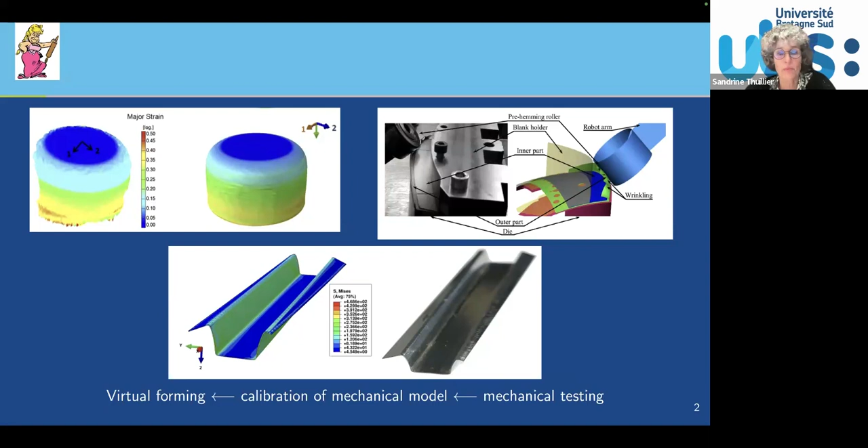So in order to characterize anisotropy, hardening, and rupture, the aim is: how can we deal with such a huge amount of information? I will start with a question for you.

So what is your absolute dream? In the field of mechanical testing, of course. Well, mine is: I would like to have such an input. This input is to have the equivalent stress as a function of the equivalent strain for a given material.

You have really a perfect, unique curve that describes the mechanical behavior of the material. Of course, to derive such a curve, you need a model in order to have everything superimposed, whatever the orientation, for example, of the tensile test. And this dream, well, in order to reach it, you need several mechanical tests.

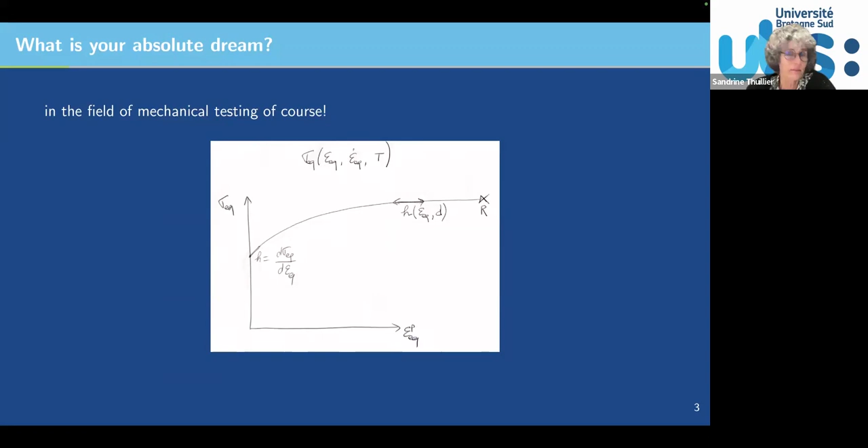And I think we are not that far. Here is, from the literature, an example of this: the flow stress as a function of the true plastic strain. Well, it's not one curve, but we are coming more and more close. But in order to have this, you have all these tests to characterize the mechanical behavior.

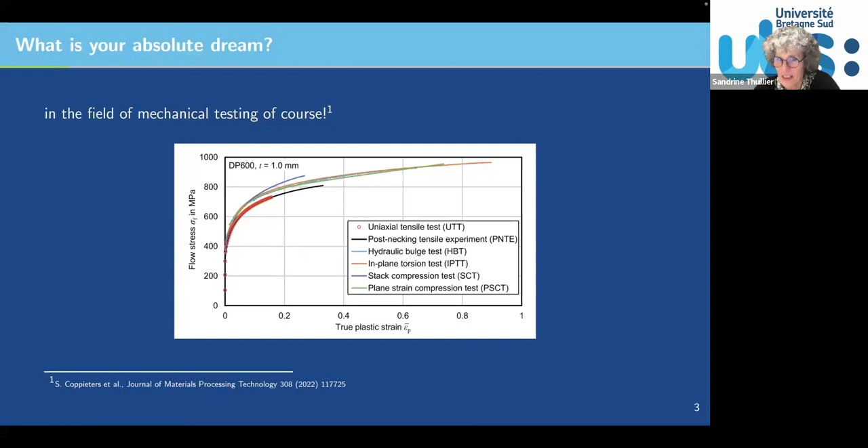So mechanical testing is a key to reach my dream. And as you know, mechanical testing will give you the answer.

When you consider a sheet metal, you mainly define the deformation, the strain, or the stress state in the sheet plane. Here you've got the minor strain, and on the y-axis, the major strain, and one straight line is one mechanical test. So you've got biaxial testing, simple shear, tension here, and tension with necking, so it's not really a linear strain path. For each curve, you need a mechanical test.

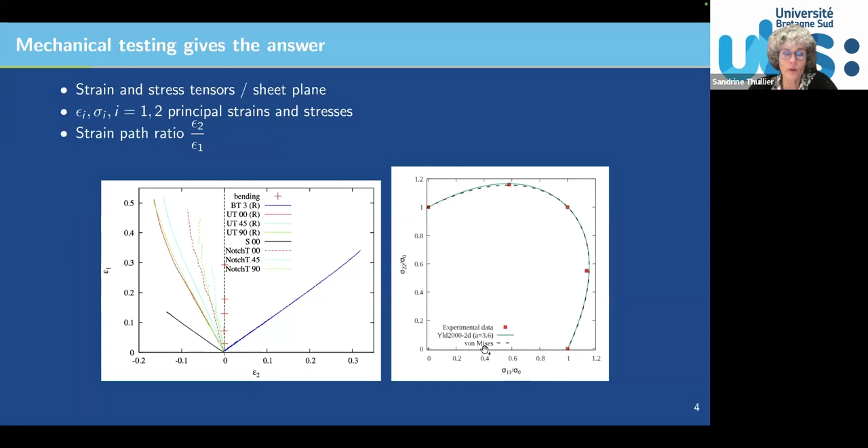You have a similar representation in the stress space, using the components of the stress tensor. But for reaching such information, you need some information. And from this, you may have two different trends.

One is what I call big database. So for one material, if you want to characterize it in tension, in shear, in hydraulic bulge test, in plane strain tension, up to rupture, you may have to do, and this is my own calculation, around 60 quasi-homogeneous tests, and maybe up to 100 if you consider including reverse strain path changes.

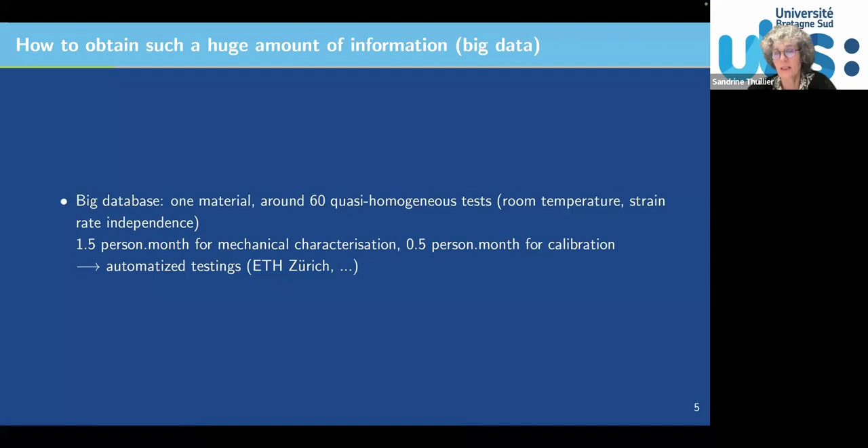So it's a lot of time, it's a lot of material, you need human resources in order to carry this out. So one solution is to do automatized testing, and you may be aware, for example, in Switzerland by ETH Zurich, they have developed mainly for tensile test, automatized mechanical testing. So this is what I call big database.

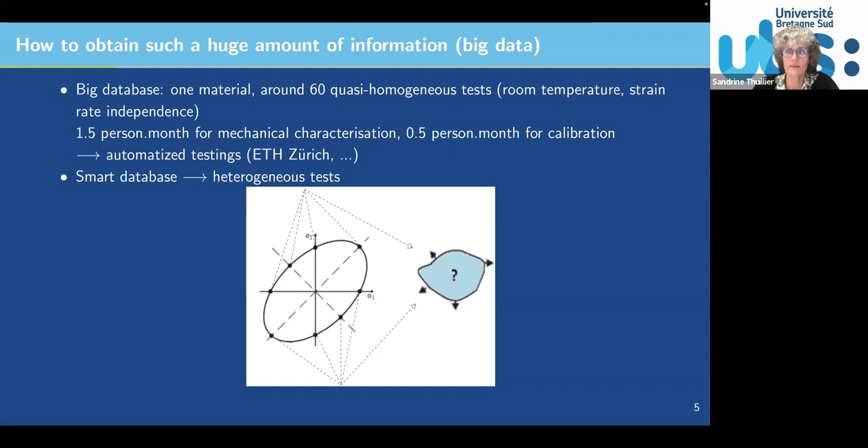And I will suggest another possibility, which is what I call smart database, which is less data, less mechanical testing, but in order to reach the same amount of information, you will have to use heterogeneous tests, meaning that with one or at least a few tests, you will obtain information as rich as with several homogeneous tests. The main question is, what kind of test can I do? And this will be the aim of my talk today.

After this introduction, I will briefly review from the state of the art a little bit of the history of heterogeneous tests, and then some ideas on how to choose heterogeneous tests, and then I will conclude.

So dealing with heterogeneous tests, it seems to be understood that one of the earliest ones is in 1998 by Meuwissen, but maybe the very, very first one — you recognize this is a tensile test, a very classical one, but beyond necking. And when you are beyond necking, this is obviously something which is non-homogeneous.

But the problem with necking is that it's an uncontrolled mechanism. You never know exactly where necking will occur, so you don't control the heterogeneity, and it could be a little bit difficult to follow by digital image correlation.

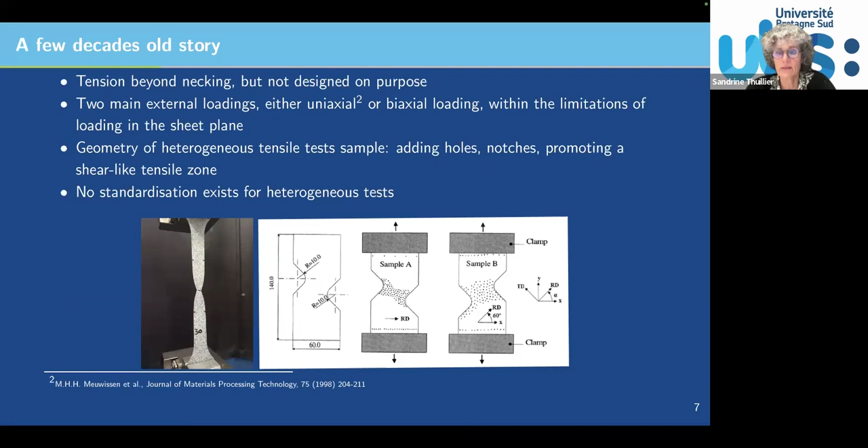So the idea was to use discontinuity in order to control where the heterogeneities will occur in a sample. The idea is to add holes, notches, to promote a shear-like tensile zone. The main issue, I would say, is that there is no standardization for this heterogeneous test, which means there is a large number of them.

Here is maybe the first one, 1998, but you can see it has been a kind of ongoing activity, and we still have new tests today. So what these authors introduced is mainly notches on tensile tests.

So here you've got monotonic loading, so you just pull in one direction. All of these geometries, you just pull along one direction — tensile type heterogeneous testing. But you can also have holes and also discontinuities. The idea is to have rich information where you have materials, in order to replace several tensile shear tests with only one test.

And many more again. Usually people have designed these geometries by intuition. This is typical engineering by intuition — they try to guess what could be the good geometry in order to obtain rich information. And we know if we add holes, it will promote localization, but near the edges it could promote a kind of tensile test. So these are the main ideas.

And there's also a different approach, which is using optimization. You could, by shape optimization, obtain a geometry. So you take an indicator and try to maximize the heterogeneity — for example, the strain range, you want to have both small and large strain during your test. So you try to promote a large range of strains, but also strain paths. By defining these several indicators, you may end up with a geometry, by shape optimization.

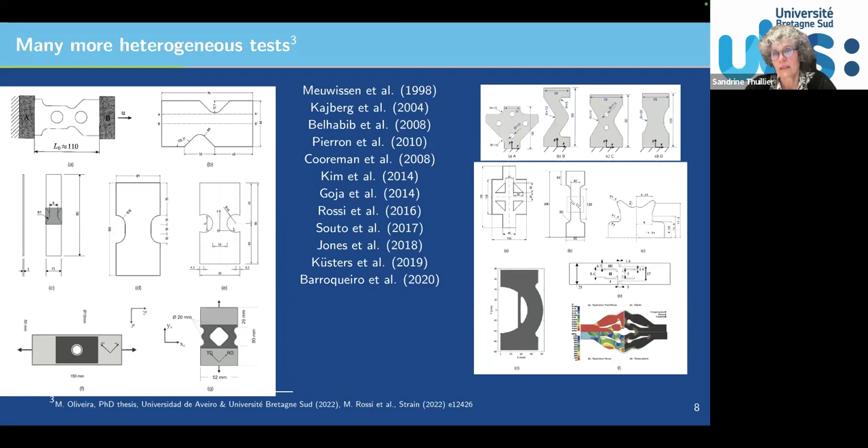And I would say more recently, people have also tried topology optimization in order to design a good shape. So this was the very first one, and you can see even in 2021, and I would say it does not stop there — even nowadays there are still more geometries.

In this case, these are biaxial testing. So you can also reach a biaxial state, which is very important in sheet metal forming. People have thought about several geometries. You can see the idea is always holes or special geometries in order to introduce biaxial testing, but also shear, and also this, which is both shear and tension.

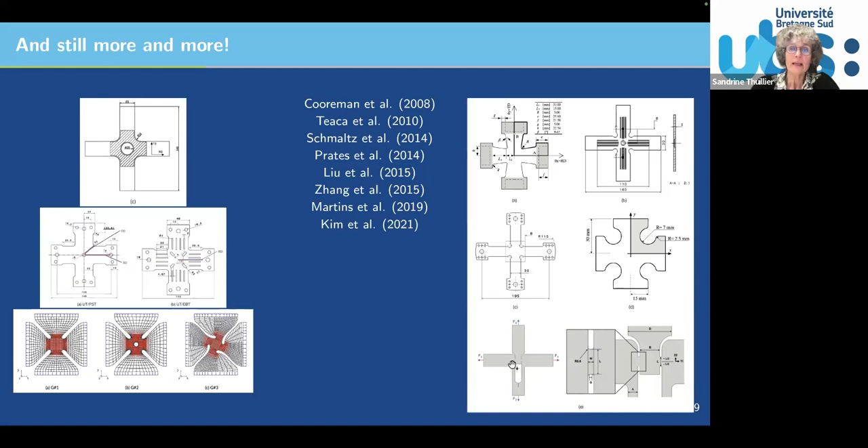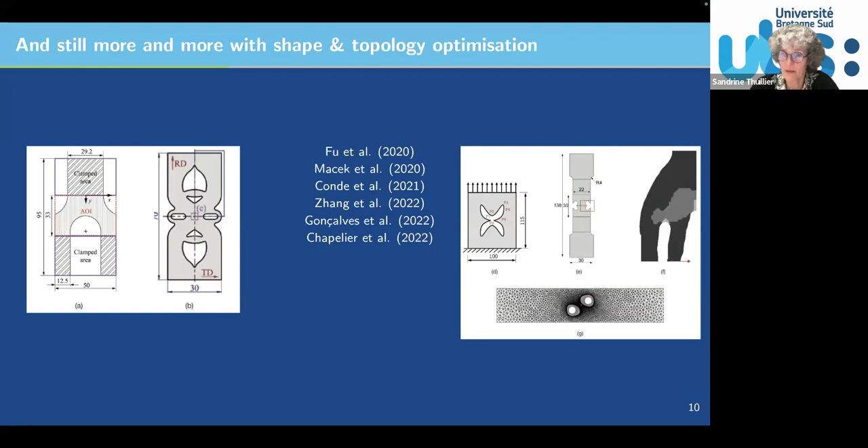As already mentioned, people design this shape not only by intuition but also by topology optimization. By topology optimization, you put materials where you need it, so you will necessarily create holes within your sample. These are different methods in order to design a heterogeneous test.

The previous ones were mainly in-plane displacements, but you can also find out-of-plane tests. This one seems typically inspired by the forming process: you've got a circular blank and tools like in forming, and by moving this tool in this direction, you get mechanical deformation as an out-of-plane displacement. In this case, they use incremental sheet forming, directly the forming test, in order to identify the material parameters.

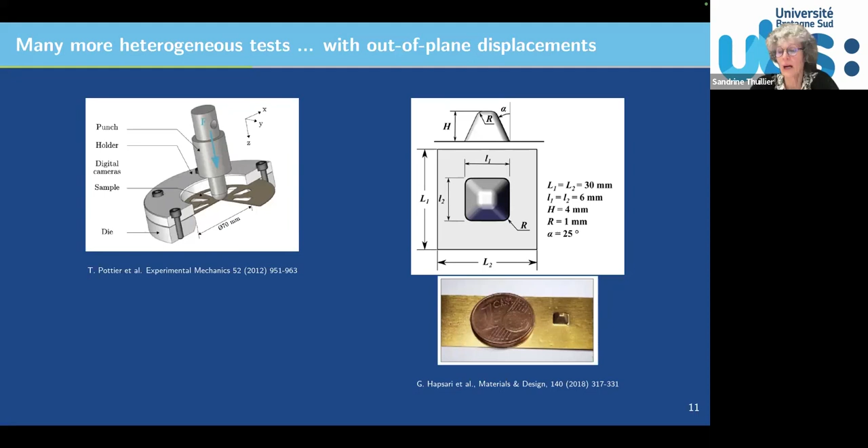So you see a wide range of heterogeneous testing. In the literature, I would say every study, every article, more or less has a different heterogeneous test.

Now you've got a shape. If you find out how to choose one, you've got a geometry, boundary conditions, and we can define what we call the three pillars of using heterogeneous tests, which is: you need inverse identification.

In this case, you don't have a direct closed-form analytical expression relating strain and load to stress and strain. So you will need finite element analysis and inverse methodology in order to determine the material parameters from the output of your test. Classically, I would say nowadays there are mainly two methods.

It's not the only ones, but I would say these two are the most used: finite element model updating, FEMU, and VFM, virtual field methods. In both cases, this is inverse identification.

In the first one, I would say this is the most straightforward: you use a finite element model. Let's imagine you've got here on top the numerical model, the finite element model, and at the bottom, the real experiments.

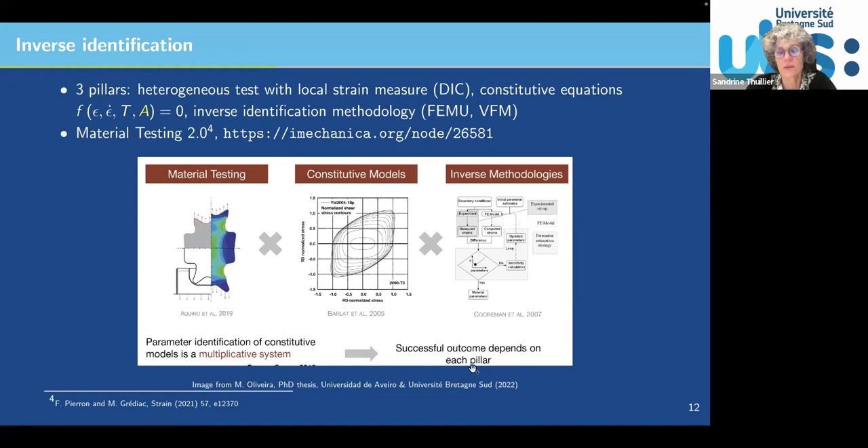I will now focus on some examples to show what kind of results can be obtained. My first example is about biaxial testing, performed with both an aluminum alloy and a DP dual phase steel. This cross-shaped specimen leads to a non-homogeneous strain field in the center.

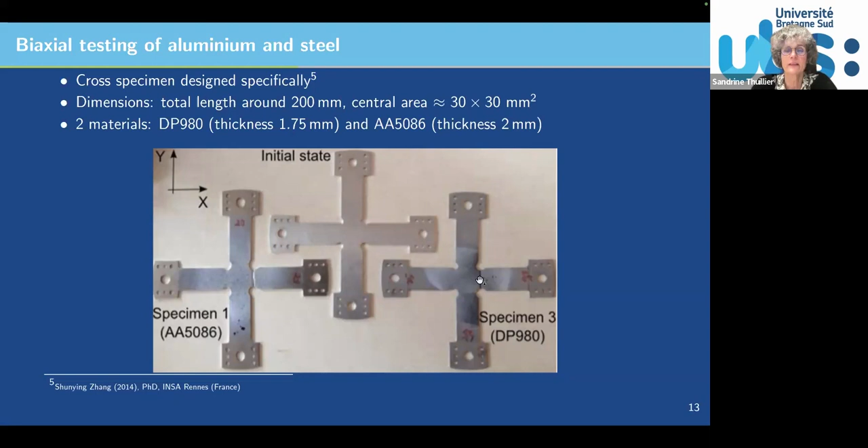Just to give you an idea, in this case we used digital image correlation to capture the strain field, but we didn't use the whole information over the area of interest—we used only information along a line, I would say to simplify the problem.

If you follow this information, looking at the minor strain and major strain graph, you can see that in blue, for the aluminum alloy, you have points along a line very close to uniaxial tension. You've got points close to biaxial tension, but also points at several orientations, meaning with only one test you can cover all these kinds of homogeneous states. This is the richness of it.

For aluminum, we reached higher strain; for dual phase steel in red, strains were lower, but more or less these are the same strain paths. With only one test, you can cover more or less five strain states, and you would have needed five different mechanical tests to reach the same thing. This really illustrates the interest of heterogeneous testing.

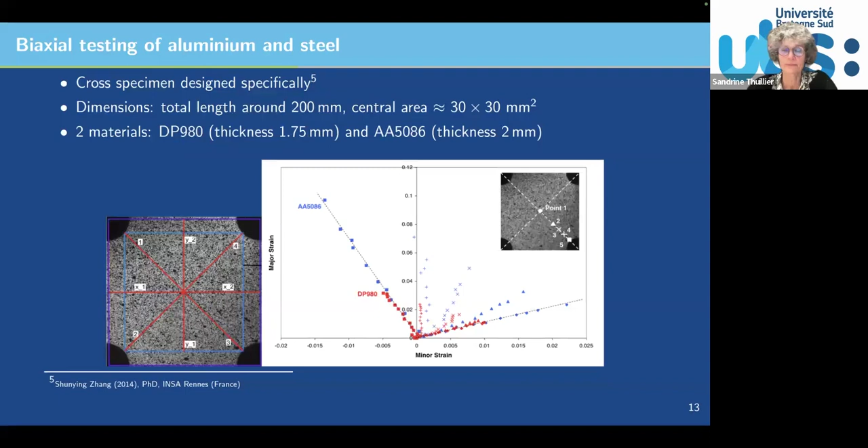I know it may not be familiar to you. It's a French anisotropic yield criterion involving 12 parameters. So we used such a criterion.

So one test, and you can reach a very good correlation with the prediction under loading. Sorry, not really monotonic, a homogeneous type test.

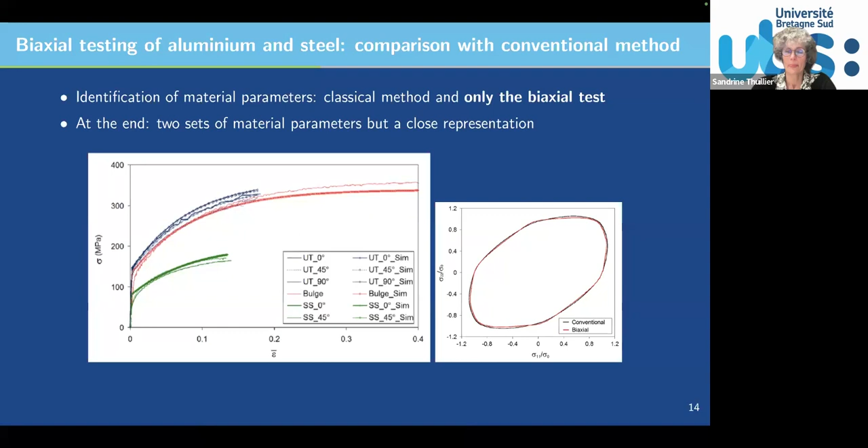Okay, so this was very encouraging results. So let's try to go on.

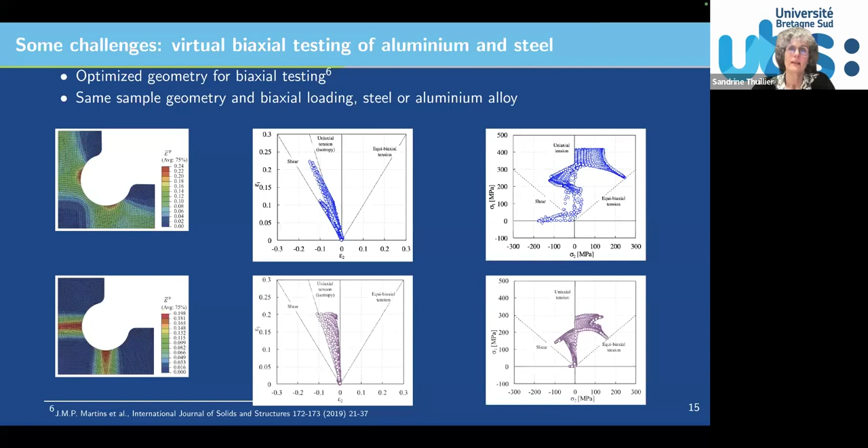So that's a challenge with heterogeneous tests, and you have to investigate the influence of the material behavior.

Another example that I've maybe already a little bit mentioned previously is this shape, which was designed by shape optimization. So we used an indicator in order to promote several features, to enhance heterogeneity, to enhance several strain modes over the sample. And the funny shape that you have here comes from this shape optimization.

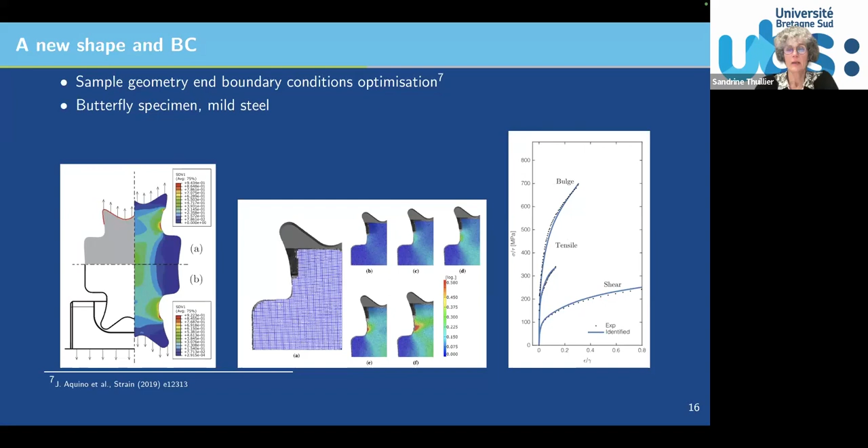In this case, it was also hardening and anisotropy. It's just to illustrate that it's a different shape, but it can still give you good answers.

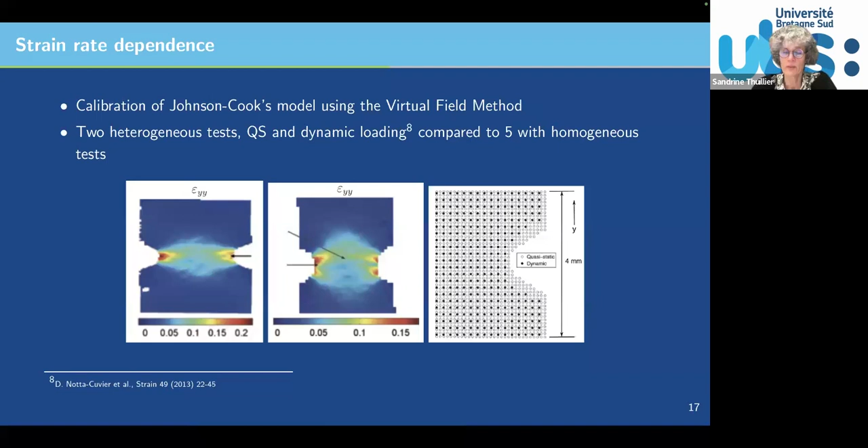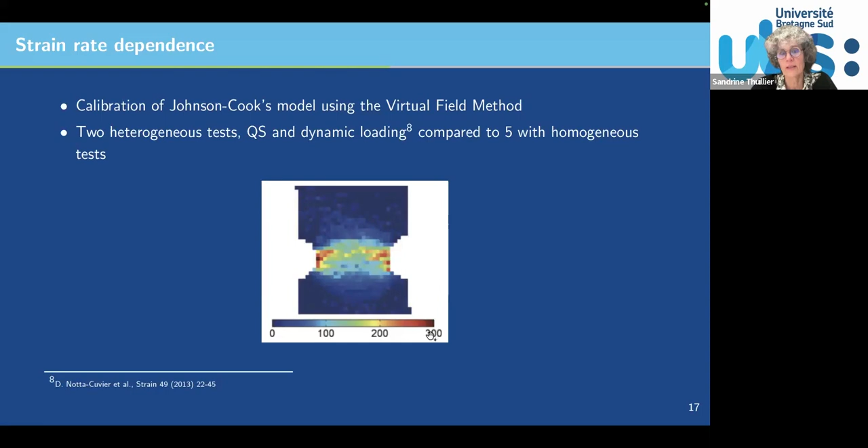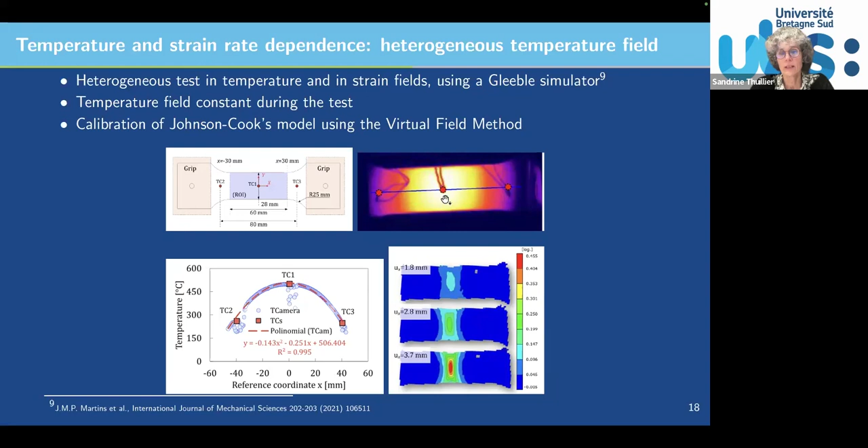For example, here in the center, you've got thermocouples at these three positions, and you regulate your test on the temperature in the center. An infrared camera was also used to capture the full temperature field, so you have an idea of the temperature field over the x coordinate, along this direction. So you've got both a localization of the strain in the center, but also a temperature field which is non-homogeneous.

The idea was also to calibrate a Johnson-Cook model, considering it's a multiplicative model. So you've got a hardening term multiplied by the strain rate dependency, multiplied by the temperature dependency. The idea was to try to identify all the components.

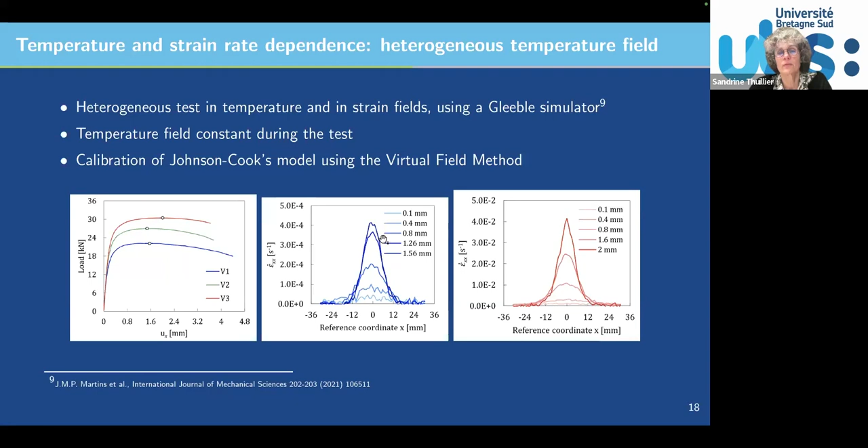In this case, the virtual field method was used, which is another method to calibrate material parameters by inverse methodology. The load signal was used at 3 different speeds of the test, and the idea was to investigate and characterize the strain rate evolution. So over a sample, you've got an evolution of the strain rate, and this information helps you calibrate the model.

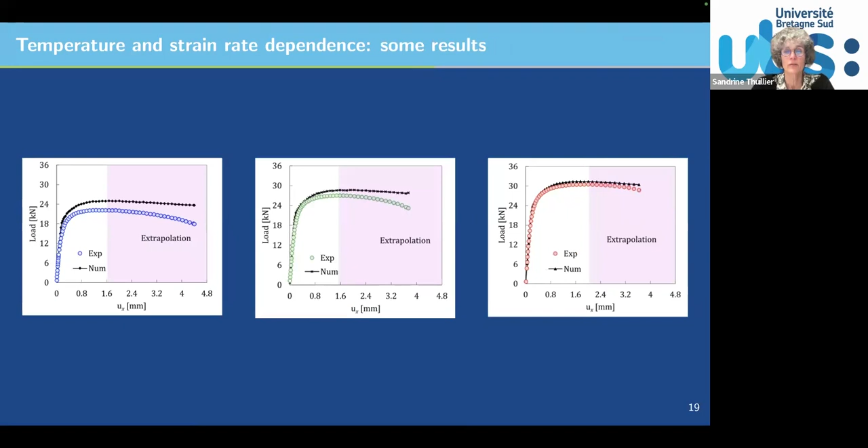So here are typical results. You can see, well, in this case, quite a good description of the load. It's not that good at this strain rate, but we also know it comes from the limitation of the Johnson-Cook model.

So this was my main selection of some typical results, in order to try to get you convinced of the interest of heterogeneous tests.

So my next question is, are you ready to come on board? On board the train of what we call MT 2.0. The name comes from Professor Pierron. He wrote a paper in Strain, and he calls this approach material testing 2.0, or MT 2.0, which is, well, the new way maybe to characterize the mechanical behavior of the material.

But if you're interested by MT 2.0, the next question could be how to choose a heterogeneous test. I've shown you there's quite a lot of geometries, so how to choose one. I will just try to illustrate a little bit how we can do this.

Just to show you, in this case, we consider several geometries, always heterogeneous tests. So you've got here the first geometry: biaxial loading, uniaxial loading on a notch specimen, also uniaxial loading on what we call a D shape, and here, uniaxial loading in this direction on a sigma shape.

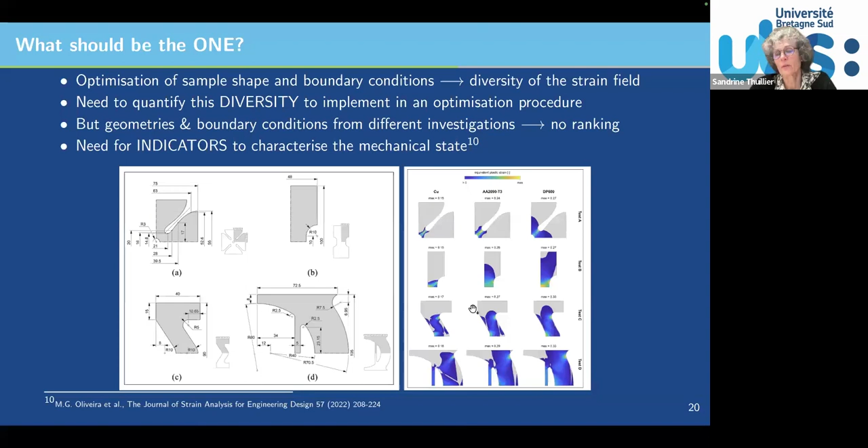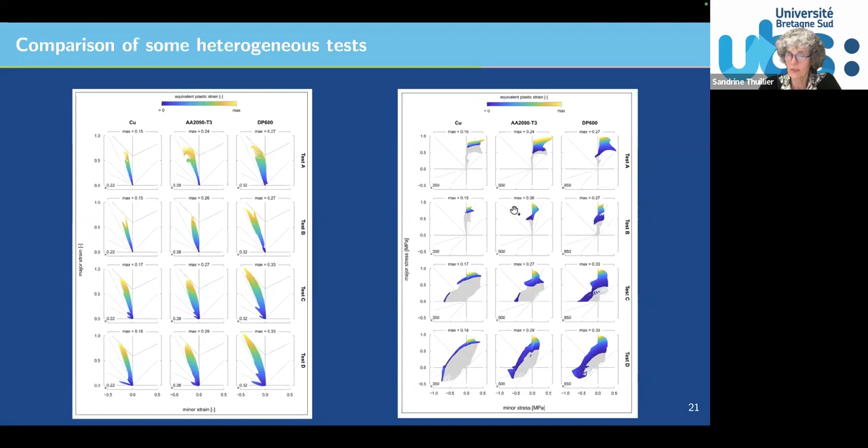So you've got here the equivalent plastic strain, but you can also plot several other pieces of information, like major strain, minor strain, so you can try to compare the tests. Do the same for the major stress and minor stress. This gives you information, and you can also look at what we call the rotation angle, the idea being how the information in the test is oriented compared to the rolling direction.

It can show if the test is mainly centered in the rolling direction—in this case it's 0—or if you have a better distribution, which is more spread out, so maybe you're more able to characterize an anisotropy with such a test compared to this one.

Information on the number of strain states: we want to promote a large strain heterogeneity in order to reach both small and high strain, and to have maximum strain for selected strain states, like tension or shear, etc.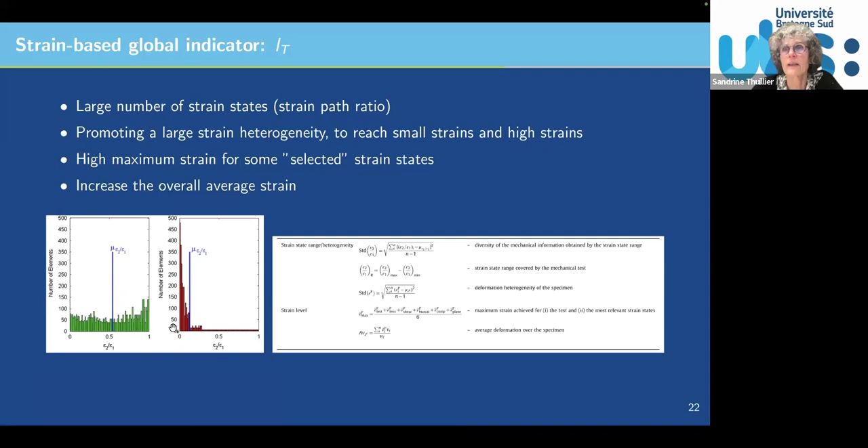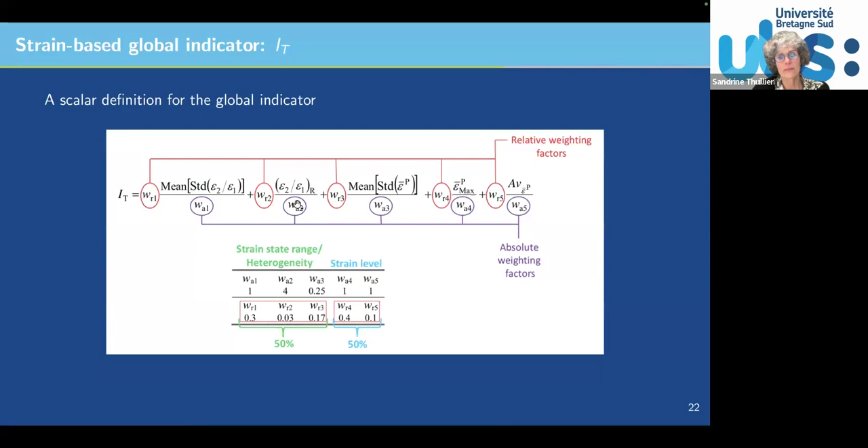The idea is to promote this behavior and not that one, in order to have rich information—that's the idea of this indicator. It's additively built from several component contributions, and of course you've got weights. These weights' influence was investigated a little, but maybe not deep enough, and the weight is there to promote the influence of one contribution compared to the others.

What was performed was a comparison of several heterogeneous tests—shear, uniaxial, biaxial, the forming type I showed you, bulge, plane strain. You see all these tests that we know, and we can rank them using this global indicator.

The idea was, since we know all these tests more or less, which one is the best? Maybe we know this one seems quite complex, and biaxial is still a good one. So in this ranking, we can see that biaxial is maybe one of the best.

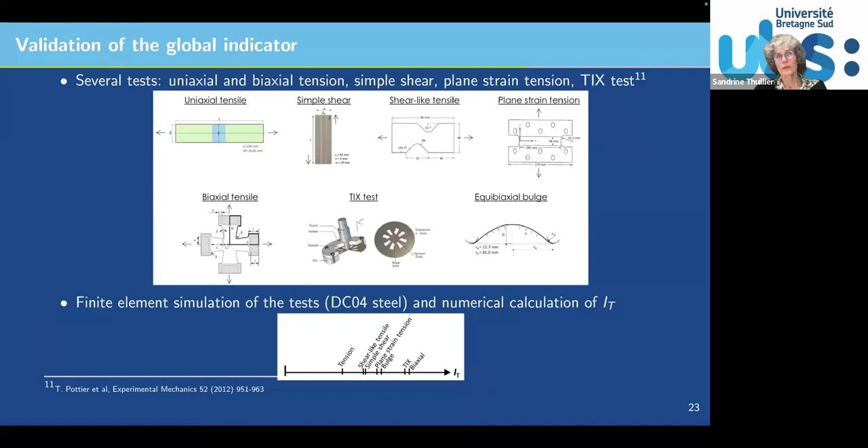So this is the idea: define an indicator in order to rank tests and then help you choose what is the best test.

The idea of the global indicator was modified a little, and a research center in France used a stress and strain based indicator, also using the principle of virtual work—when you do finite element simulation, you want to minimize this difference—so they used this information to build the indicator.

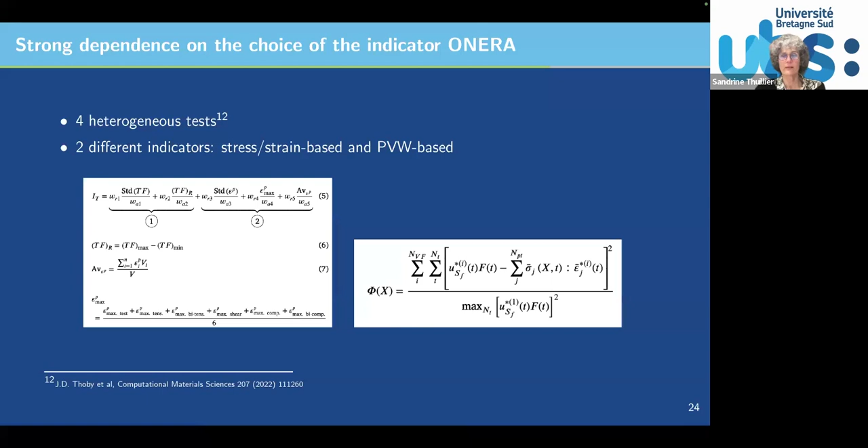Just to highlight that there are several trends to characterize heterogeneous tests. In this case, we consider 4 heterogeneous tests and 2 different indicators: either stress and strain based, or based on the principle of virtual work.

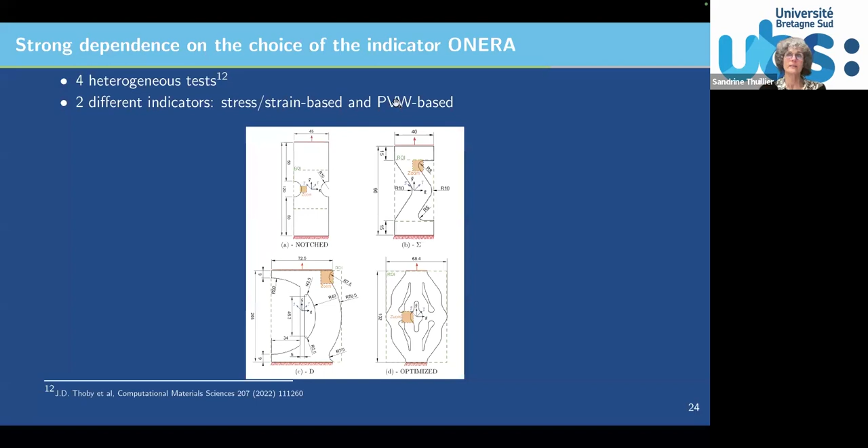The idea is, can we compare these 4 tests using either this indicator or that one? And I remind you, the idea is still which one could be the best.

Here are the results these authors obtained, still from this research center. Lots of information, but each piece here is for one test—this is a notch one, sigma shape, D shape, and the optimized shape.

They compared the different colors, so let's focus on one test. They calculate the indicator.

This one is the indicator based on strain and stress, and they compare different configurations, especially the influence of the quality of the strain measurement—either DIC without any noise, which is numerical simulation, or with noise introduced into the DIC, and what the influence of that noise is on your calculation.

What they've shown is that you have to be very careful, because there may be a non-negligible influence of this noise on your results. This has to be taken into account when considering heterogeneous testing.

One way, since the design of heterogeneous tests is mainly based on numerical simulation, to take into account the quality of the strain measure is to use synthetic images. You can generate synthetic images and add noise, so that even within a virtual world, you introduce variation coming from the noise of your DIC, a virtual DIC. This is very important.

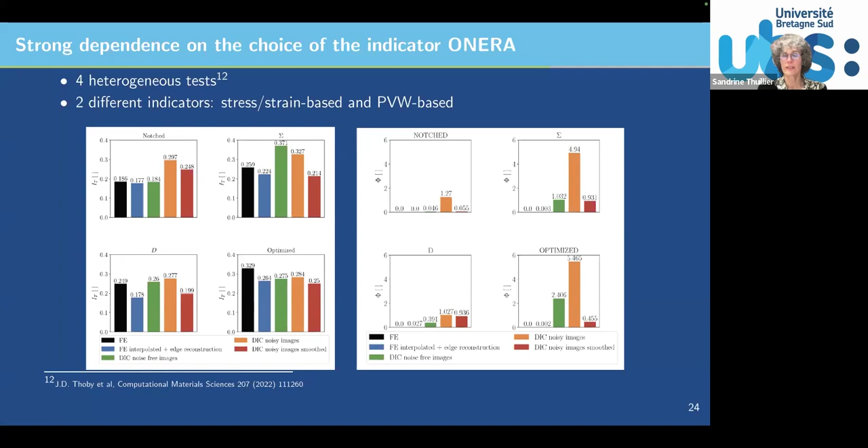Next, I'll show you some other results. I wanted to mention that these were obtained within a European project, still going on, finishing by the end of the year, led by a colleague of mine at the University of Aveiro in Portugal, with several partners in Italy and Belgium, and MatchID, which is a provider of DIC systems.

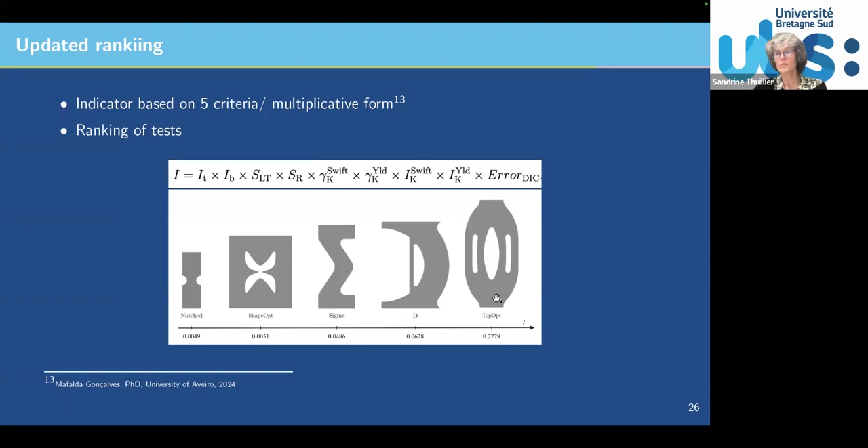So we did an experiment. At the moment, I would say that in heterogeneous testing there's been a lot of work in numerical simulation to find the best geometry, but at this stage there are fewer results in the experimental part. The main aim for the following months or year is to obtain also experiments.

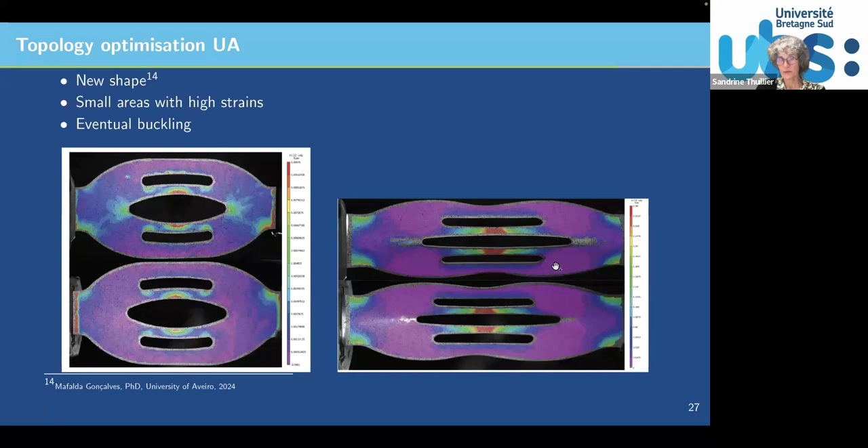You've got an example here of this topology optimization sample, more or less in the initial stage, and after deformation. It illustrates very nicely where you do have localization of strain, but you also have a huge amount of information coming from all over the sample.

Time for my conclusion. I've tried to summarize it in three main parts. First, I try to promote smart databases of heterogeneous tests, because you still need to carry out a lot of tests and evaluate the robustness of your heterogeneous test. You still have to perform on several materials and design indicators to carry out this evaluation and comparison. That's mainly my main conclusion.

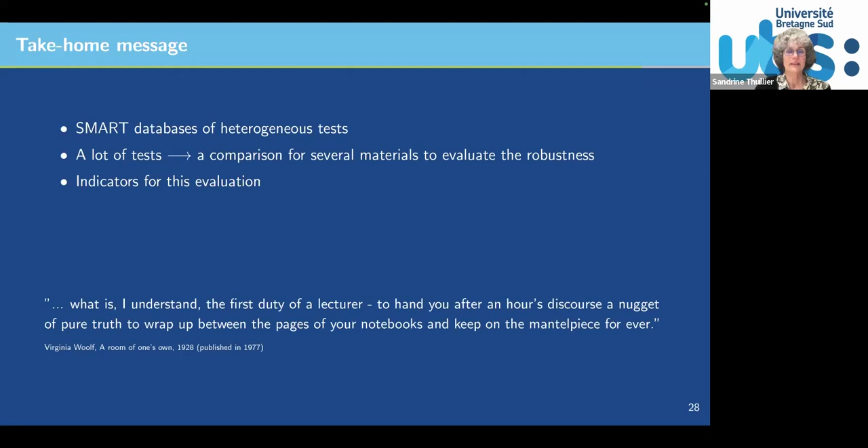I'll just highlight a few perspectives we're pursuing: more experiments on heterogeneous testing, and promoting a benchmark by performing the same test in several labs in order to compare, which is one of the aims of the European project I mentioned. Also, if we consider calibration from homogeneous or heterogeneous tests, what would be the influence on virtual forming, since the aim of calibration is to provide input data for virtual forming? Finally, to introduce strain path changes, since I've presented mainly monotonic loading.

Very finally, thank you very much, Jan, for your very kind invitation to be with you today. And thank you, all of you, for your attention.

Thank you so much for an excellent talk, very detailed in terms of looking at the history as well as looking to the future. This is excellent, thank you so much.